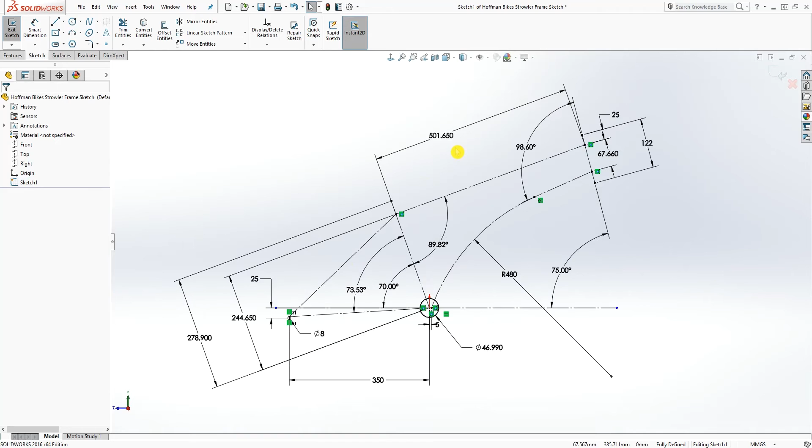Just in case you don't have GrabCAD, let me show that again so you can see all the dimensions. I'm going to move this around so it's clear — this is a 25, and it's just a dimension going from this origin point to that line. I'm trying to make sure you can see everything, just in case you choose not to download the file and want to draw the sketch yourself.

The best way to do it is to look at this shape, try to draw it first, then go into the sketch and add the dimensions to it. Again, this is the dimension. So to start, we are going to extrude this circle.

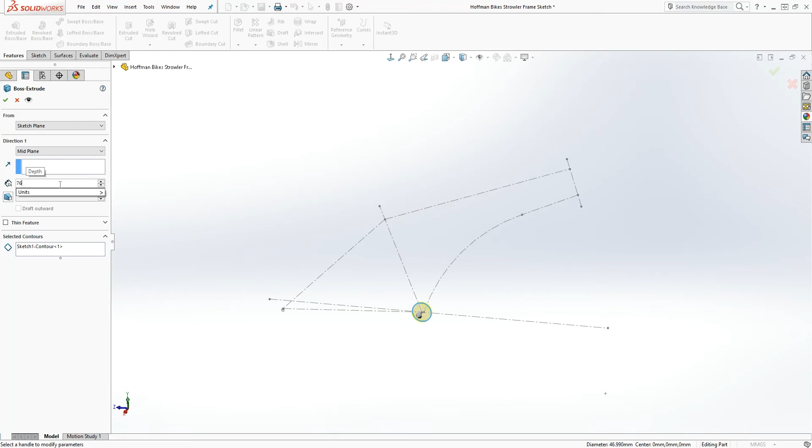We're going to extrude it by the mid plane. I'm working in millimeters, and it's going to be 76.2. So, 76.2, and click OK.

The next thing we are going to do is click on this face and draw a sketch, normal to it. I'm going to draw a circle right on that origin point going out, and my dimension is going to be 51.

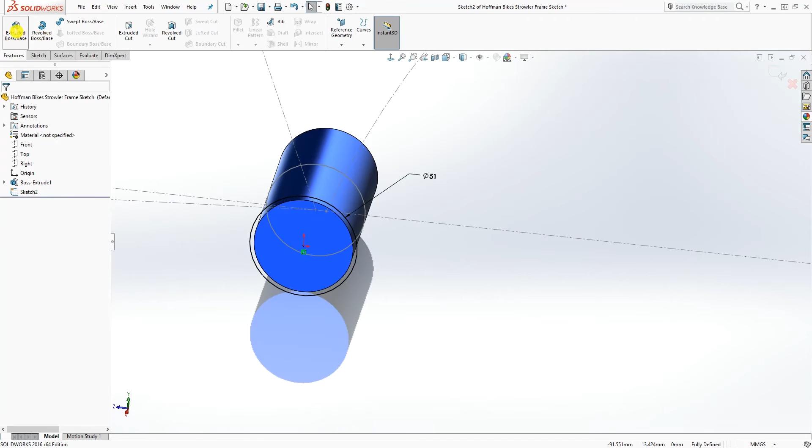I'm going to extrude it 15, going in that direction — oh, I meant extrude cut, excuse me. Make sure you select the extrude cut, going 15 in that direction, and click OK. So now I have something like that.

The next thing I'm going to do is mirror it over. I'll select that, and find the plane I want to mirror it about — in this case, the right plane — and the feature to mirror is that. Click OK.

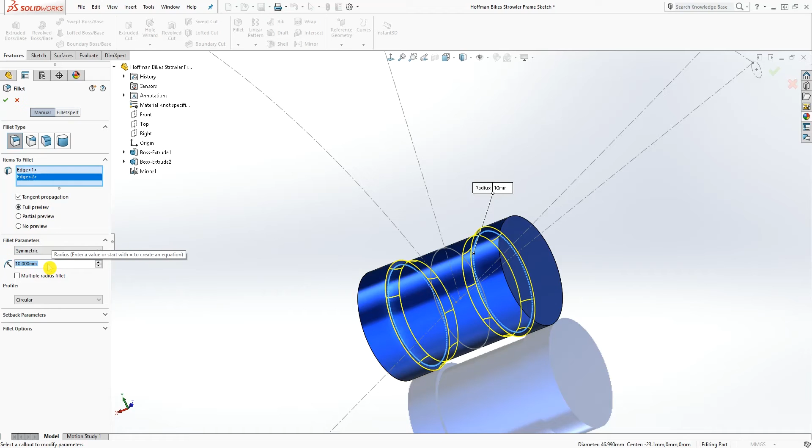So now it's mirrored, and the next thing I want to do is add my fillets. I add a fillet over here and another over there. My fillet size for that one will be 10. Click OK, click OK — so we have that fillet.

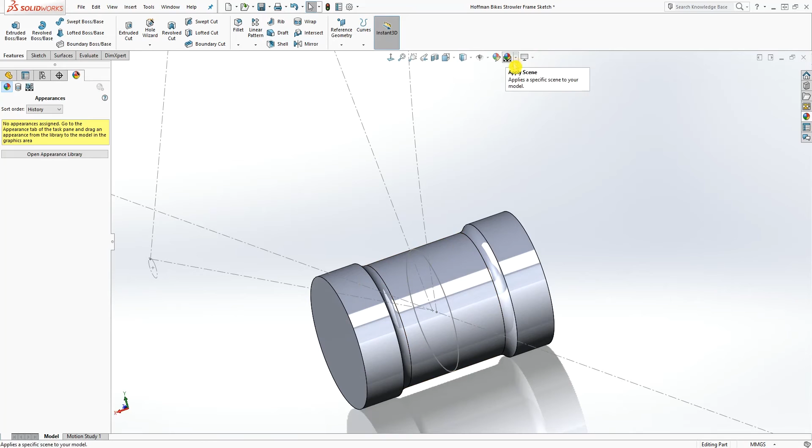We're going to add another fillet. I have my material on it now, which might be confusing, so let me remove that appearance for now so you can see what's going on, and I'll turn off my real graphics as well. Now let's go back into that part.

So again, the next thing we want to do is add another fillet — add it to this top edge and that top edge over here, and the fillet size will be 2. Click OK.

Now we can start adding these shapes. The first thing we are going to do is, on the right plane, select draw a sketch — let me go normal to it.

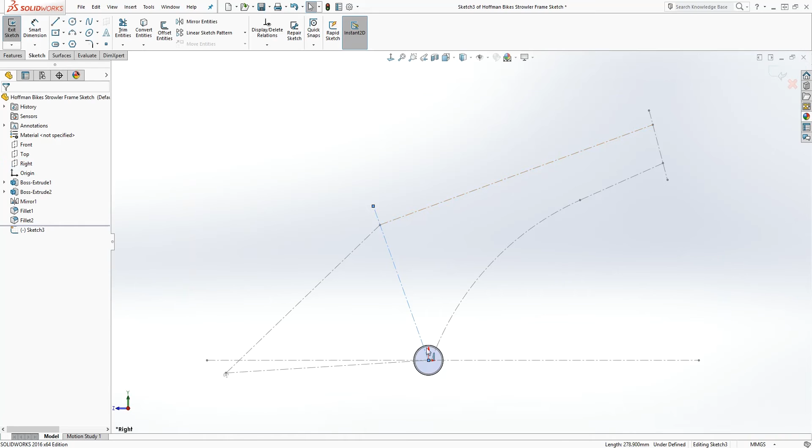So I'm on the right plane and I'm in sketch mode now. I'm going to select this line and press convert entity, and once that's converted, I can exit out of that sketch. While that sketch is selected, go into the feature and press sweep. Select this circular profile and sweep it. The diameter is going to be 32 millimeters, so click OK.

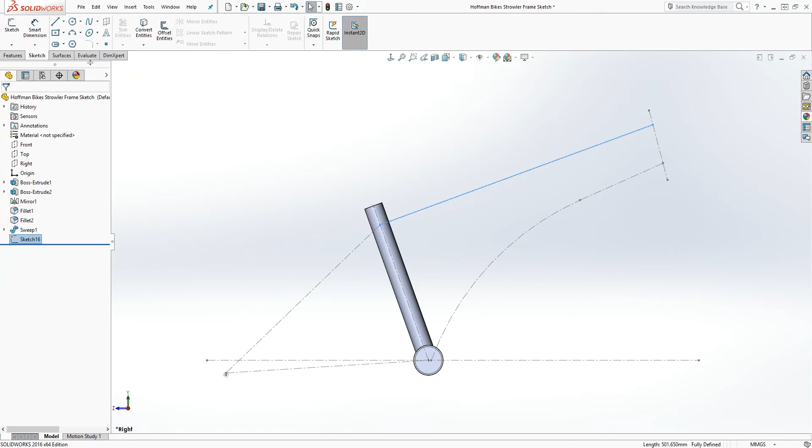We'll repeat that process for everything. For this top bar, select your right plane, draw a sketch, select that top bar, convert entity, exit your sketch, go back to feature, sweep. Make sure that sketch is selected and circular profile, and that will be 36, click OK. We'll do the same thing over here: another sketch on the right plane, select this line, convert entity, exit sketch, feature, sweep, circular, and that would also be 36.

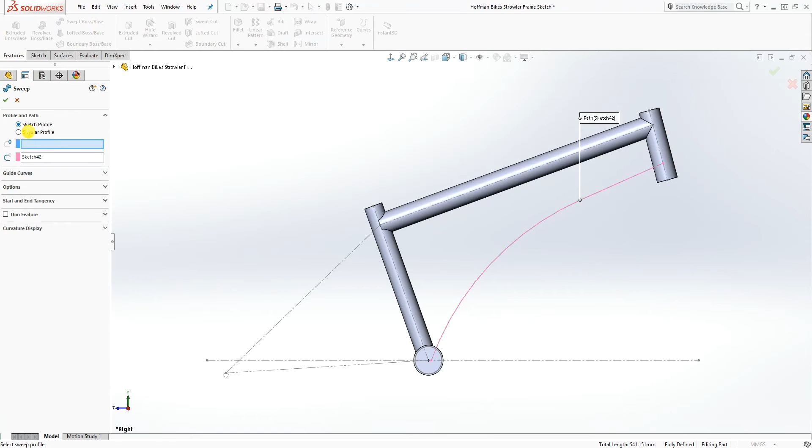Next we want to do this bottom bar, so same thing: right plane, sketch, and select these two lines. You can select one line, hold control, select the second line, convert entity, exit sketch, back to the sweep feature, circular, and that will be 36.

We have half of our frame done, and as you can see everything is coming together. The only thing we have to do now is the back frame, and we are getting close.

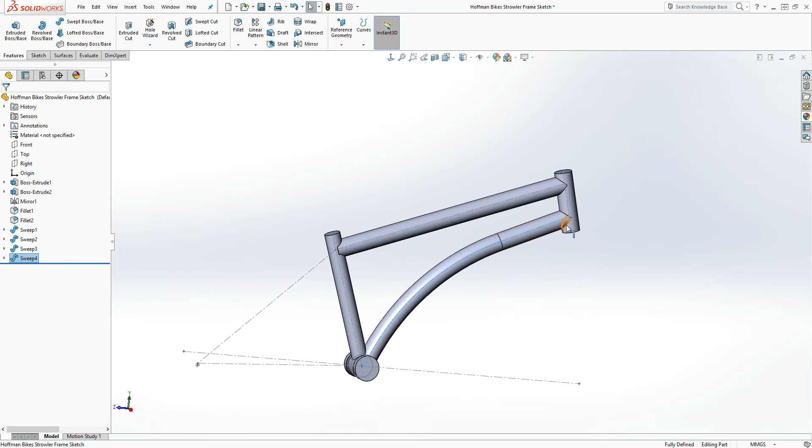The next thing we want to do is select the right plane again, sketch, Normal To, and come up here and draw a line coming from that midpoint out, drawing a shape going like this, touching there and coming back and up.

So what we are going to do is add a constraint to it. These two lines are perpendicular, that's what we want. Also make sure this line and this line, holding the control key, are also perpendicular to each other, and make sure this line and that line are also perpendicular, control key, make sure this line and this line are perpendicular to each other.

Now the distance of this line is going to be 7.5, and the top distance is going to be 20, and the angle is going to be 68. So from here to there is going to be 68.

So that sketch is fully defined, and we want to do the same thing at the bottom. Again, draw a line from this point coming out and perpendicular, something over there, over here, and something like that. Make sure again to add your constraint, making sure this line and that line are perpendicular to each other, and this line and this line are also perpendicular to each other, and this is 20.

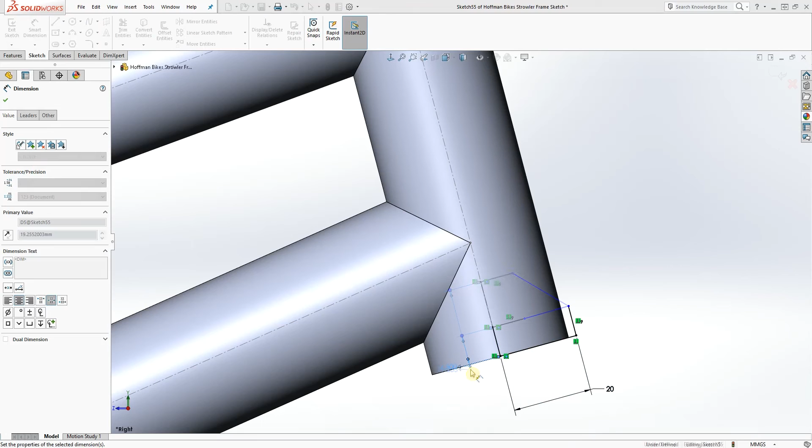So we want to select that line, make it 20, and select this line and make sure it is aligned, and that is 7.5. Or another way you can do it, we want to bring this angle up, make sure that angle is up. Sometimes I was running into this problem earlier.

So what we want to do now is select this edge, that edge, and this point, and I'm trying to make that coincident, but for some reason it's not doing that. I am trying to make this point coincident with that edge, and for some reason it doesn't want to work. So what we can do is select this point—not the point—select this line and select this line, and since we are trying to make the same shape, just make those two lines equal to each other, and that should make this line the same length as that one.

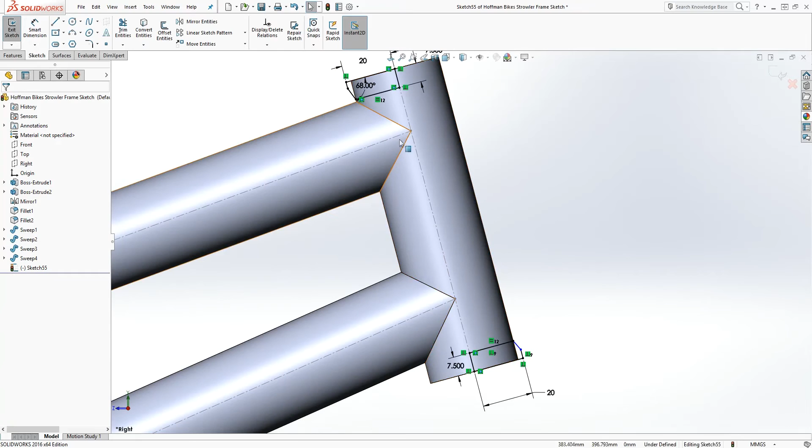Now all I can do is just add my dimensions to it, and my angle dimension will be 68. So I have a sketch that's fully defined.

Back into my feature revolve, and we want to revolve—actually, let's just cancel that, exit out of that sketch, and while your sketch is selected, now revolve. The reason I wanted to do that is because I have this sketch open and sometimes it confuses SolidWorks. So your Sketch55 is selected and you just need to select the axis, so we're going to select this line. Now we're going to revolve that, and we have that shape.

So the next thing we are going to do is start drawing and designing these bars and frame back here.

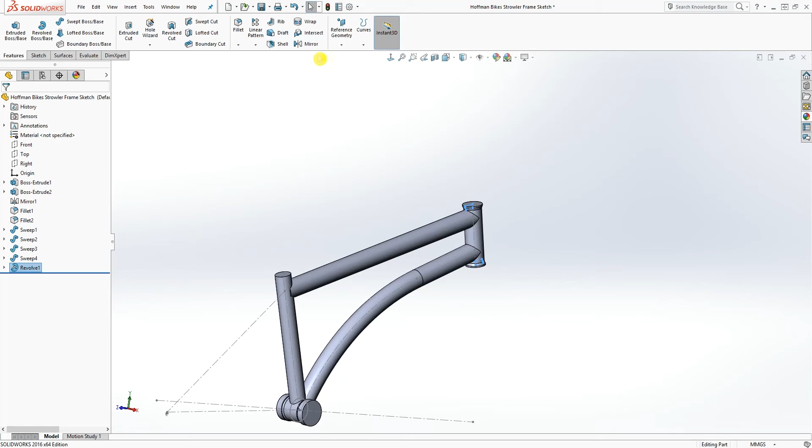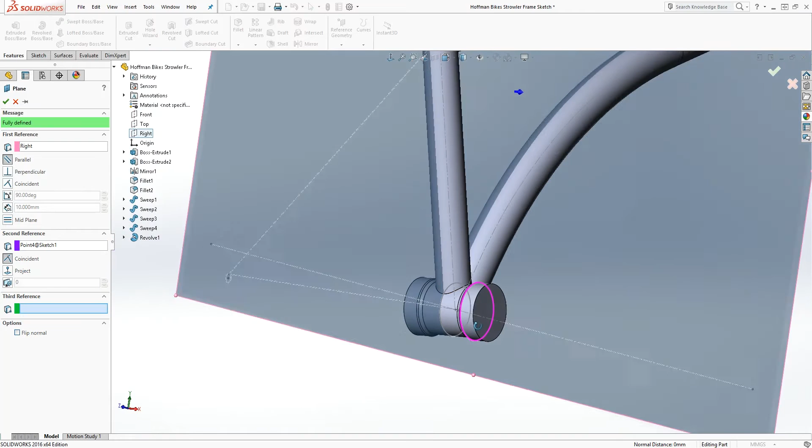Next we are going to draw a plane. Select the plane option, and we want to select the right plane as our first reference plane. While this sketch is still visible, select this top point as your second reference point, and select the origin point as your third reference. So it's the top point and the origin. Let me zoom in so you can see it. Now you have your new plane, click OK. So now we have our new reference plane, and while that plane is selected, we'll draw a sketch on it.

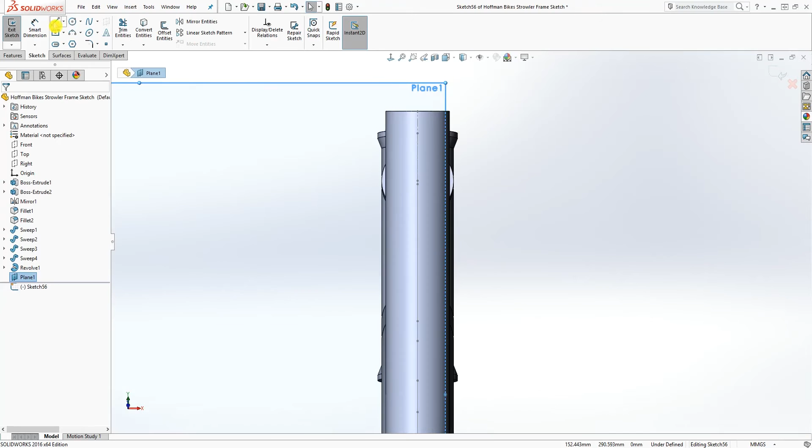We'll go Normal To, and let me make sure it's on the back correctly. We want to go Normal To, Normal To again, so make sure your origin point's arrow is pointing in this direction. We just want to draw a line, a midpoint line, starting at this back point, and draw something like that for now. Go Normal To again, make sure that line is horizontal, not vertical, and drag it somewhere here to make it coincident, and make it a construction line. That's all you need to do, so make sure you draw that line and exit out of the sketch.

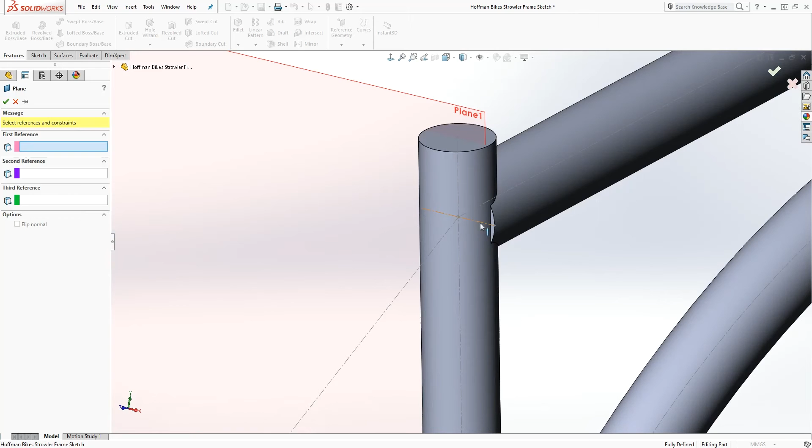Next we are going to draw another plane. Select the plane option, and now select this line and this point, so we want a plane that is laying on that sketch. Click OK, and that's what you want. Since we don't need plane 1 for now, we're just going to hide it. So we have our new plane, which is on this sketch.

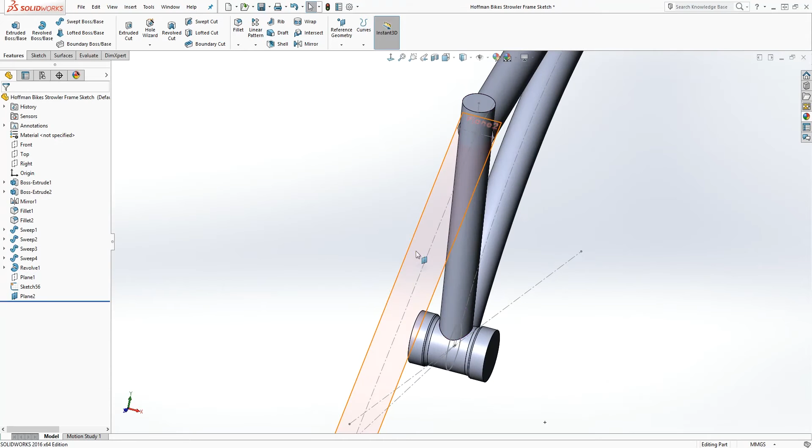So we're going to select that plane and start a sketch on it, Normal To, and make sure you go Normal To again, so your arrow is pointing this way, that way that plane is on top. Because if I go Normal To and the plane is on the bottom, it could be a little confusing. So make sure you go Normal To, press it again, and make sure the arrow is pointing in this direction, so you're looking at it from the top.

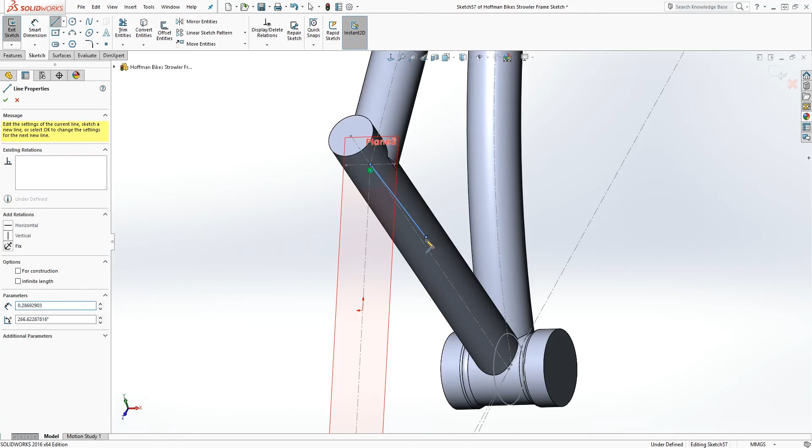Now we want to draw our sketch. I'm just going to bend this a little bit, and you want a line from that point. So just draw a line and another line, and let me go Normal To again so you can see what's going on. Draw a line like this, and also draw another line in the middle that is vertical, and make that line a construction line. Now we can temporarily hide that first sketch so you can see what's going on.

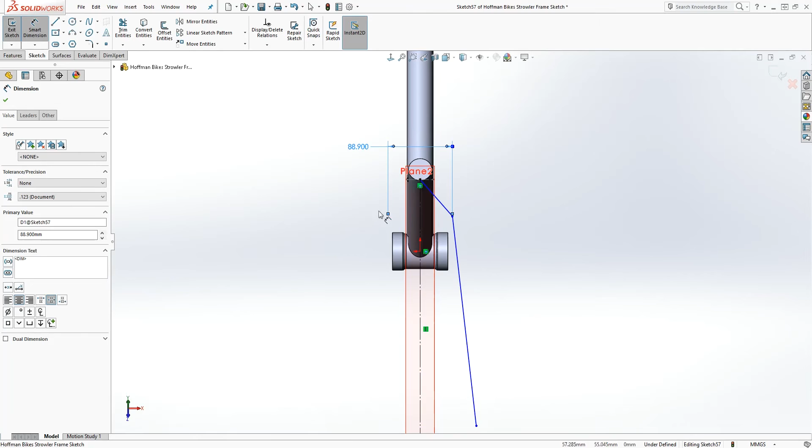Now we're just going to add our dimensions. From this point to that point is going to be 88.9, and that is the diameter. Notice when you select the point and the center line and drag it out, it gives you the overall length, and that's what you want. For this one, from this point to that point, that is going to be 330, and from this point to that top point, it is going to be 63.5. We need one more: from this point to the center line again - if I move it here, it gives me half of it, and when I move it to this side, it gives me the entire length. So that is going to be 114.3, and click OK. Our sketch is fully defined.

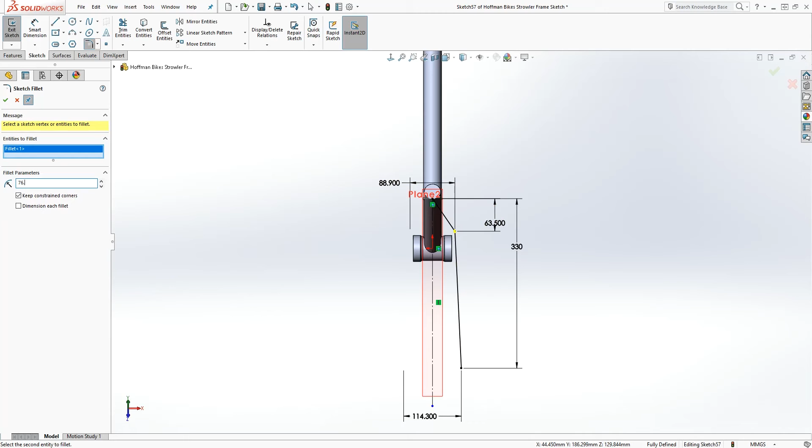We need to add one more thing, so we are going to select the fillet tool and select that point to add your fillet, and change your fillet size to 76.2. Let me zoom in so you see what's going on. 76.2, and click OK. So our sketch is fully defined.

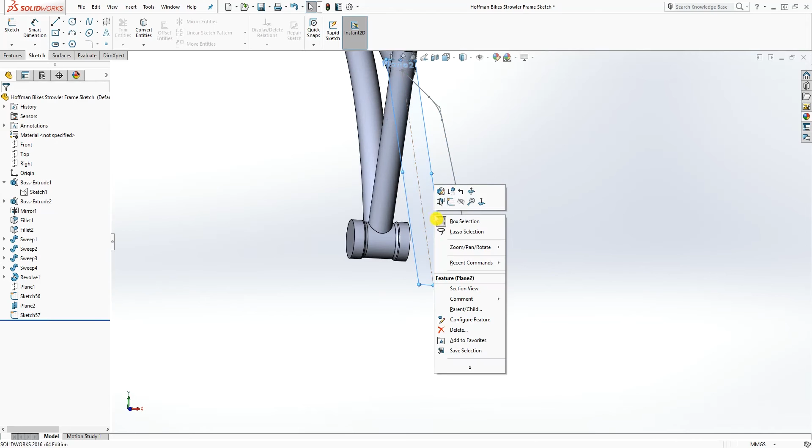Let me move this around. Fully defined, and I'm just going to exit out, and I can hide that plane for now. What we want to do is draw another plane. So go back into our feature, select reference geometry plane, select this line, and select that point, so that way we have a plane that is perpendicular to that line, and that's what we want.

And now we are going to select that. I didn't select, okay, let me do that again. Reference geometry plane, this point, this line, and that point, and click OK. So we have our plane 3, and while that plane is selected, you're going to start a sketch.

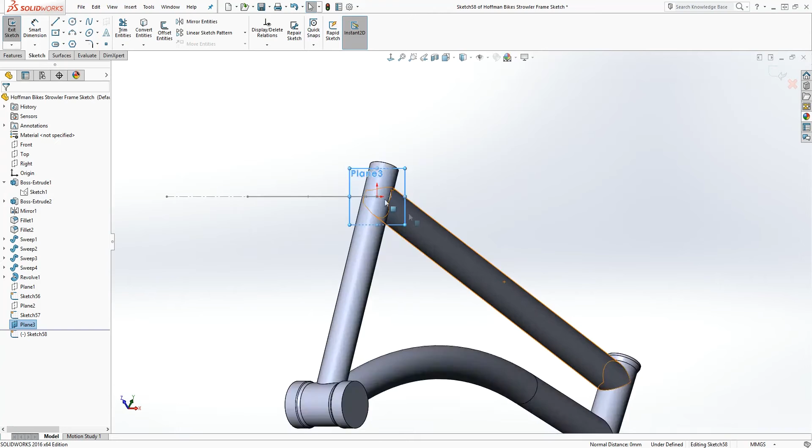So your sketch is on that plane. Make sure you go normal to. It should look something like this, and zoom in, and now draw an ellipse on that point, on that origin point. Just draw your ellipse, something coming up and there. Make sure this point and the origin point is vertical to each other.

The top dimension, this dimension is going to be 15.5, and the second dimension, which is from this point to that point, is going to be 12. Once our sketch is fully defined, we're going to exit out of that sketch, and we can hide our plane 3 for now so it doesn't get confusing.

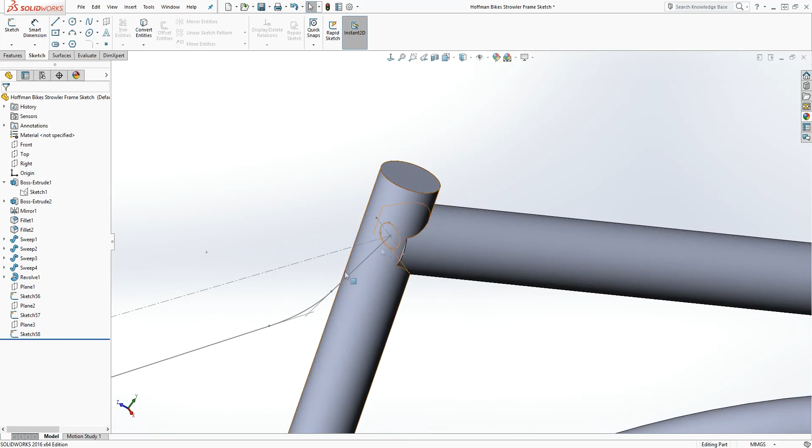So we have our profile and we have our path, and what we are going to do is go into the sweep feature. Select your profile, and select your path, and you're just going to sweep it around there, and make sure your profile and your path are correct, and select OK. So that we have that top frame done.

So we need to do the same thing at the bottom. Let's show that first sketch again. Now select your top plane, which is right there. Draw a sketch, which is going to be a midpoint line, and go normal to, and just start the sketch at the origin point and drag it somewhere out like that, and make sure it is horizontal, and make it a construction line, and exit out.

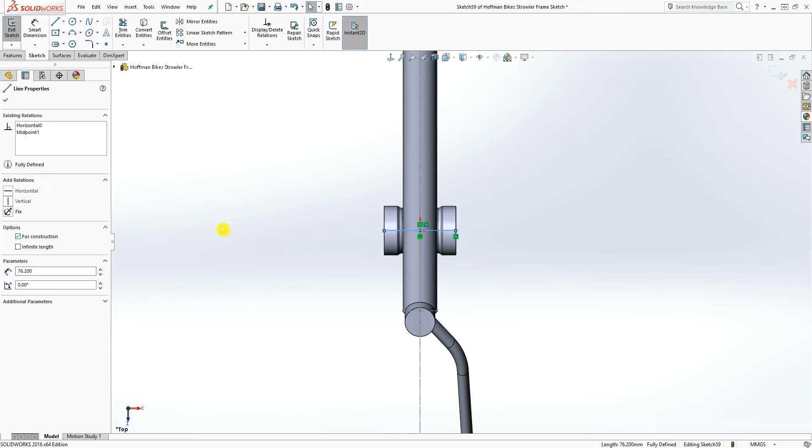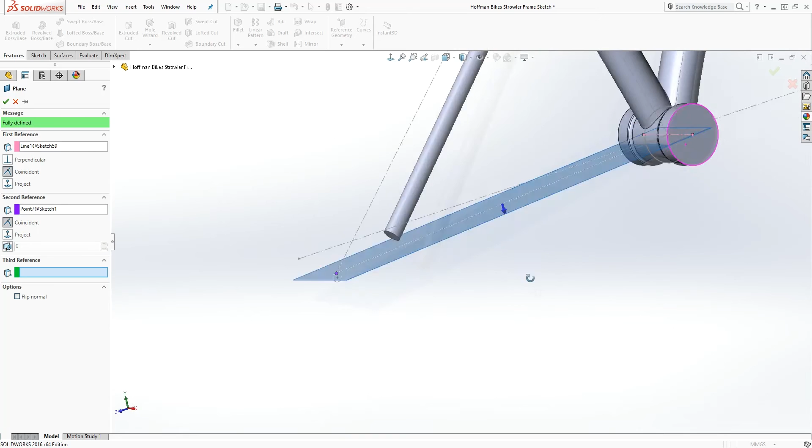And now you want to draw a reference plane. Go back into your feature, reference geometry plane, select that line you just drew, and select this point. So you draw your reference plane on that bottom edge on that bottom sketch. I hope you can see, I know it's a little bit confusing, but I hope I've been able to explain it a little bit clear. Click OK.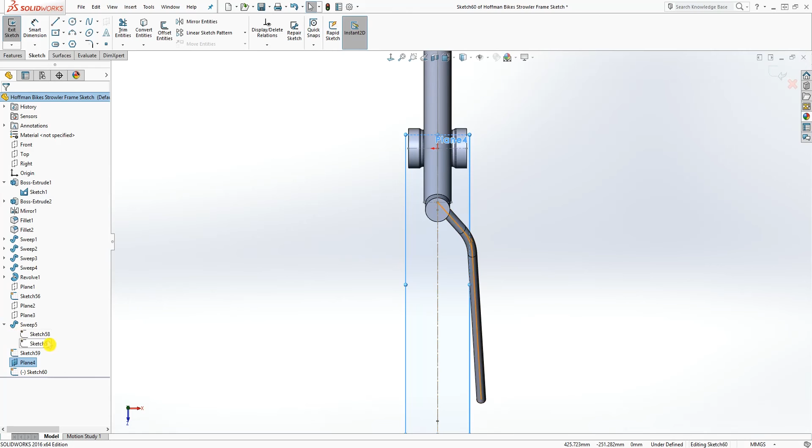So now while that new plane is selected, you want to draw a sketch, and go normal to, so that way you're looking at it, and go normal to again, so that way you're looking at it from this point. So what we want to do is make sure this profile, let's show that sketch. We are going to select this sketch, that sketch, and this sketch, and we are going to convert entity, and you can hide it now once you do that.

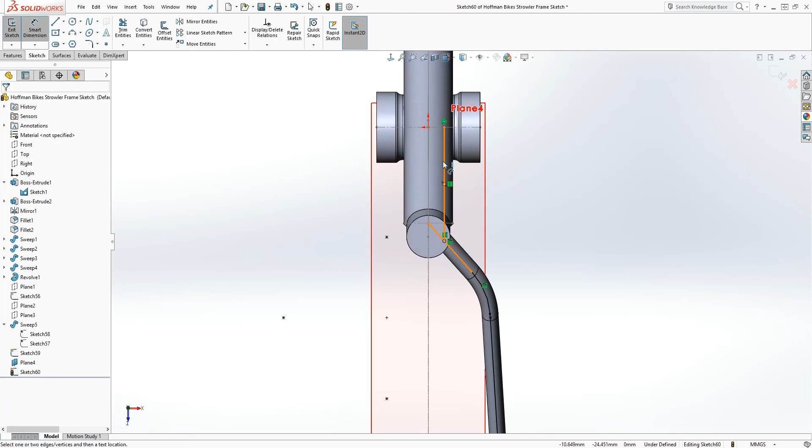So we have that sketch over there, and we are going to draw a line from this point just coming down. Just draw a line that is vertical coming down and kind of like touching that sketch. The distance from this line to the origin point, let me make sure that line is vertical, and the distance from this line to the origin point is going to be 25. So everything is fully defined.

So what we're going to do is trim this excess line off, and at this point we are going to add a fillet over here. Let me select my fillet and change my fillet size to 22, and I'm going to add it over here and click OK. So I have a fully defined sketch, and I'm just going to exit out, again, so you see what's going on, and I can hide that plane 4. Let me just hide it, and let me exit out of the sketch.

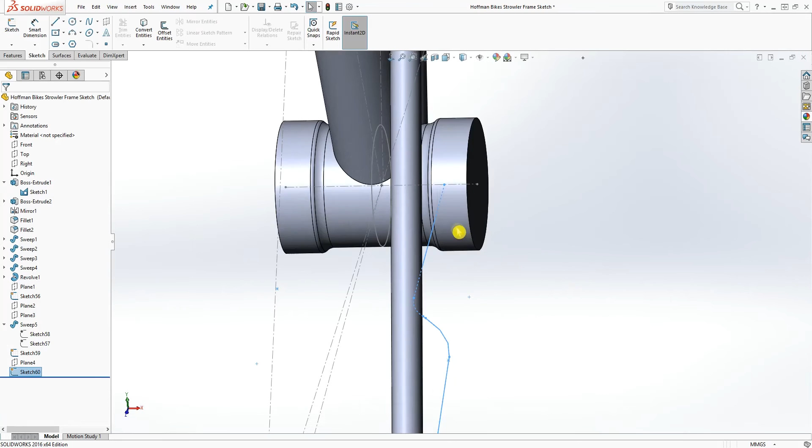So the next thing we are going to do now is draw another plane, reference plane, select this line and select that.

Select that line and select this point. Draw a reference plane over there and click OK.

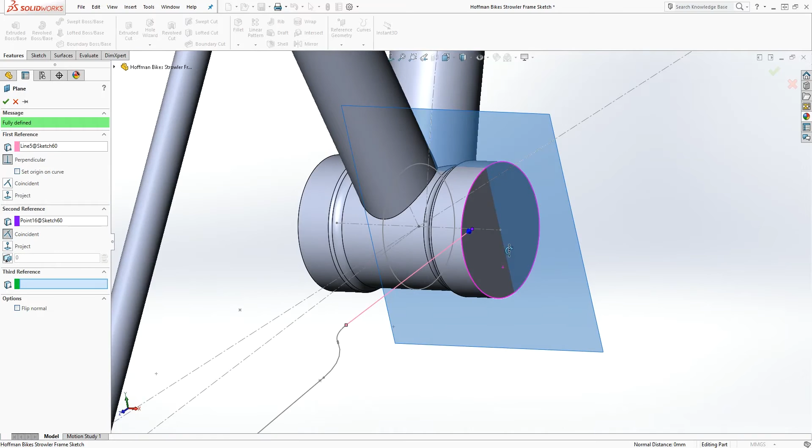Now once you have your sketch, while that plane is selected, draw a sketch normal to, and make sure you just draw an ellipse on that. Make sure it is on that point and something going out like that, and I can go normal to again, and I'm going to zoom in, make this point and the origin point vertical again.

Now add your dimension. This is going to be 15.5, and coming down from that point to that point is going to be 12.

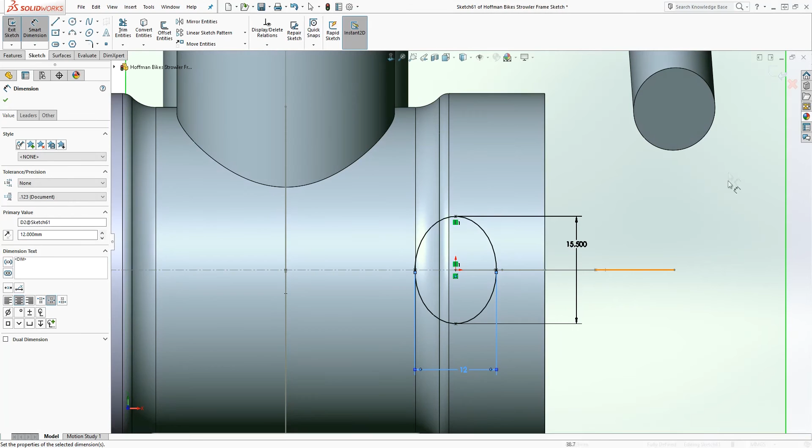Exit your sketch. I can hide that plane now, and we have our profile and our path. So again, go into your sweep feature, select that ellipse you just drew, and select the sketch as your path.

Now we're moving along with this, and the next thing we need to do is select the right plane. Before I do that, make sure this top sweep shows that sketch. Let's hide this for now, hide that sketch, I don't want everything to get confusing, and we can hide this sketch too. We don't need that sketch, so just showing that top sketch.

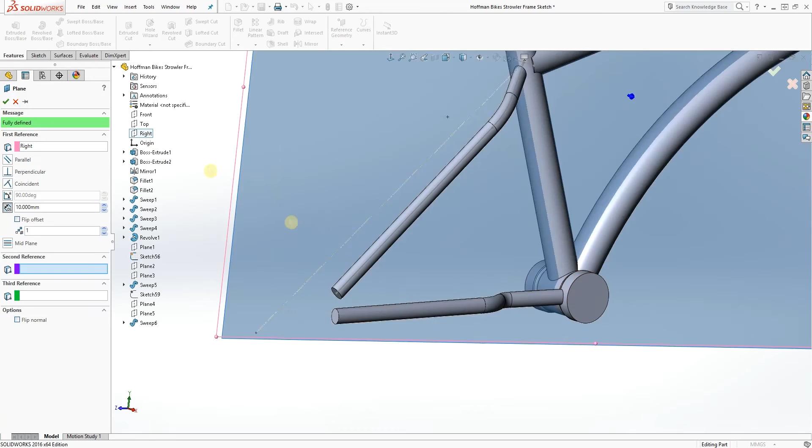So select the right plane, and now select reference geometry plane, and our first reference plane is the right plane. Now we want to select the start point on that sketch as the second point, because we want to draw that plate between these two features. So click OK.

While that plane is selected, draw your sketch, normal to, and now we're just going to draw another ellipse somewhere over here. So we're going to draw something like that, and the dimension from this to that going up is 50.

The dimension from here to here is 62.770, and the dimension from this top to the origin point, I'm going to have to move it around to be able to get that dimension. Okay, so make sure you move it up somewhere.

So the dimension from here to here, it is not that point, this point and the origin point, and I want something linear. I'm not getting that now, so let me add a couple the other ones maybe.

So the origin point to the midpoint of that ellipse is going to be 337, and add another dimension from this point to the origin point, and that is going to be 328.

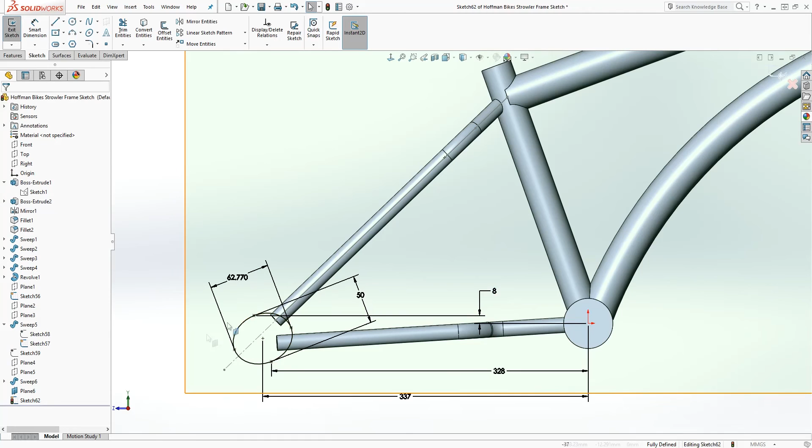So my sketch is fully defined and I have my profile. What I'm going to do is exit, and go into my feature, extrude, and you want to extrude it by the mid plane, and it is going to be 3.7846, and click OK.

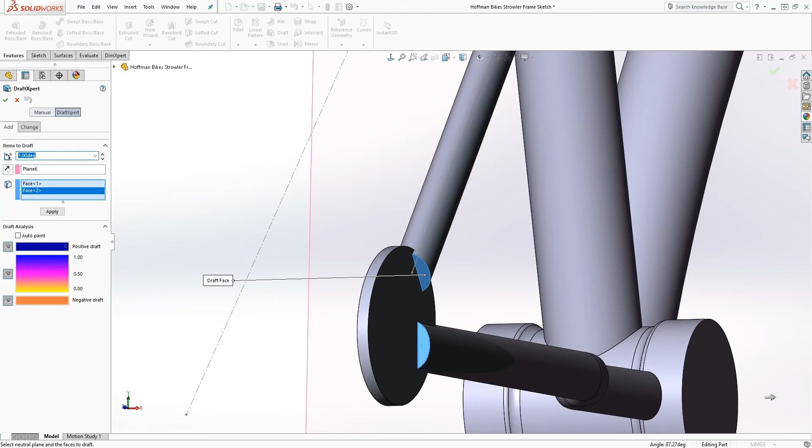So now we have that. Another thing we want to do is add a draft angle here. Click on this draft, and your reference plane is going to be that plane, which is your plane 6, and you should just select these two faces, and the draft angle is going to be 65, and click OK.

So you have that draft angle, and we are going to do the same thing on this side. Draft, select this plane first so it shows plane 6, and select those two faces and click apply. So the draft is going in the wrong direction.

So I can click OK and come down here and just edit that draft, and what I want to do is switch the direction and click OK. So now I have it going in the right direction.

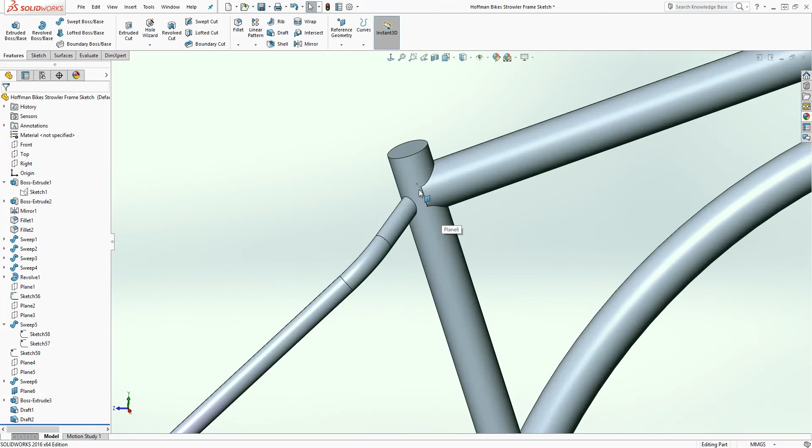So the next thing we want to do is we can now hide this sketch. We really don't need it, and we can hide this sketch as well, and let's show our first sketch because we need that. Click on this face and draw a sketch.

Go to normal to. You can hide that plane 6 too, just so it doesn't get confusing. So we are drawing a sketch on this plane.

Draw a line, then draw two more lines over here and another line down here. Click this line and that circle and make sure they are tangent, click this bottom line and that circle as well and make sure they are tangent to each other. Also draw another circle over here, something like that, and make this circle and that line tangent, and make the circle and the bottom line also tangent to each other. So you have something like that.

Another thing you have to do is make this line and this line parallel to each other, and just drag them out like that. Now we are going to add our dimensions.

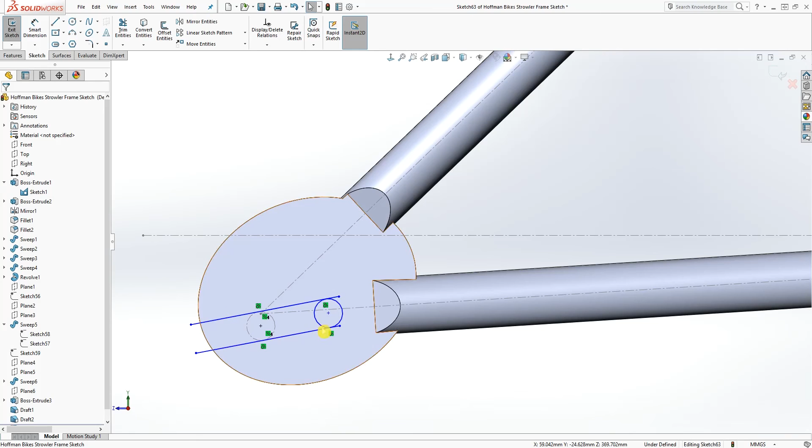First I'm just going to trim this off, so the circle looks something like that, and close this off. You can make this a vertical line, it doesn't really matter as long as it's sticking out.

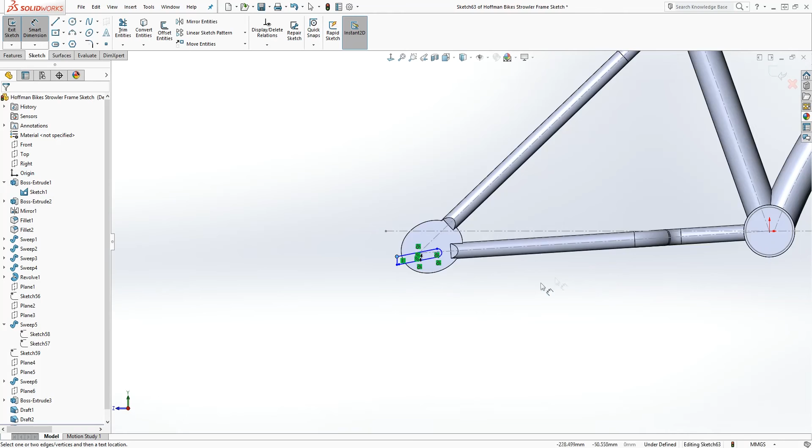Now add the dimension from the origin point - not from there, from this point to the origin point. So that point to the origin point is going to be 331.82.

And we want to select this point to the center line of that circle, which is going to be 17.89.

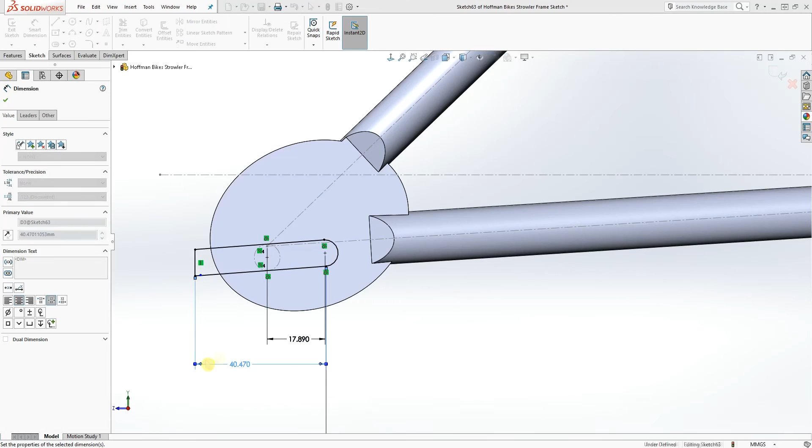The last thing we want to do is just fully define this, so you can add a dimension here to fully define it. I have a sketch sticking out over here, so I'm just going to delete that.

Make sure your sketch is fully defined, then go back to your feature, extrude cut, and extrude cut to next. Click OK.

Next we have pretty much half of that done, so what we are going to do is mirror it over. Let me hide that sketch again for now. So we have that feature, let's mirror it over.

Select your mirror, the right plane - you want to mirror it about the right plane - and the features you want to mirror starting from that sweep 5, and pretty much everything right under it. Make sure you select everything and click OK.

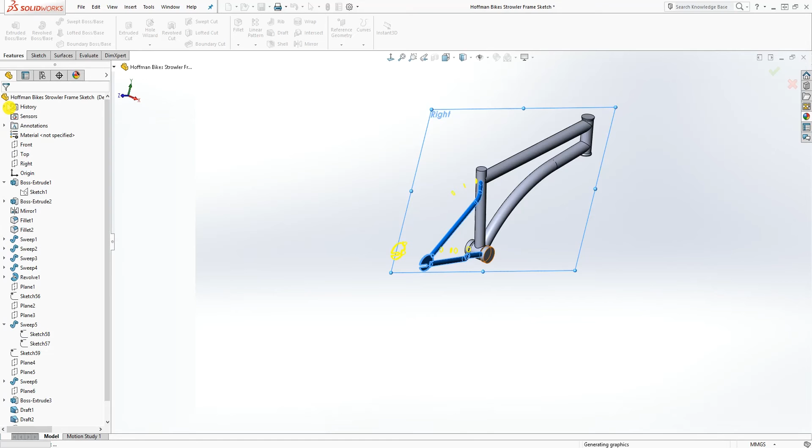Now we want to start adding fillet to it. Select your fillet tool, and it's going to be 1.25. We won't be able to add the fillet to everything - not the face, the edge. So we're going to systematically add the fillet one by one to the ones we can, and we might have to do it multiple times.

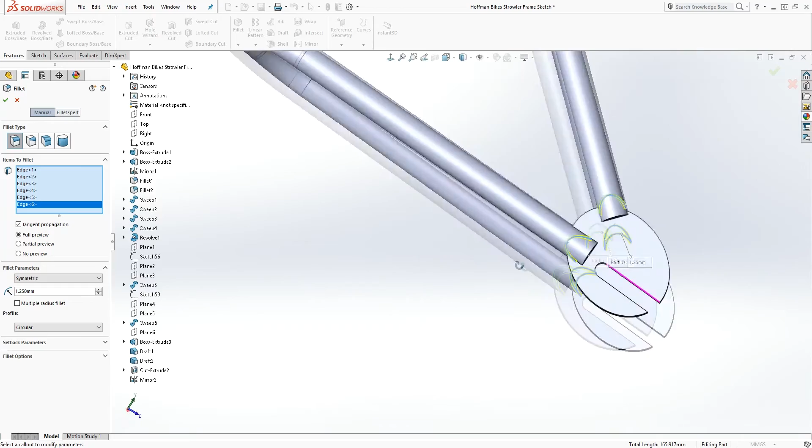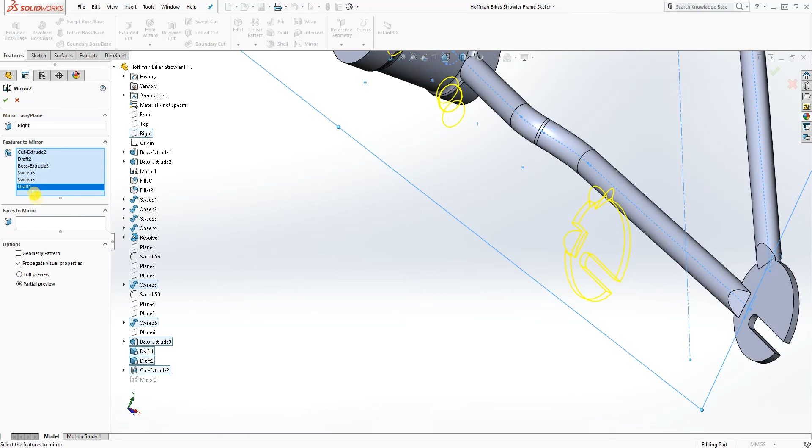So I added it up there, back here, and also here. For some reason, let me go back and verify my mirror tool. My draft angle wasn't selected, so I'm going to select that and make sure it's also showing in there, and click OK, because when I looked over here the draft wasn't on it.

Okay, now let's try that again. Fillet, and I'm going to add my fillet 1.25 to that edge, this edge. You want to add the fillet all around, so just try any method that works for you. This edge, the same thing over here, this edge and this edge.

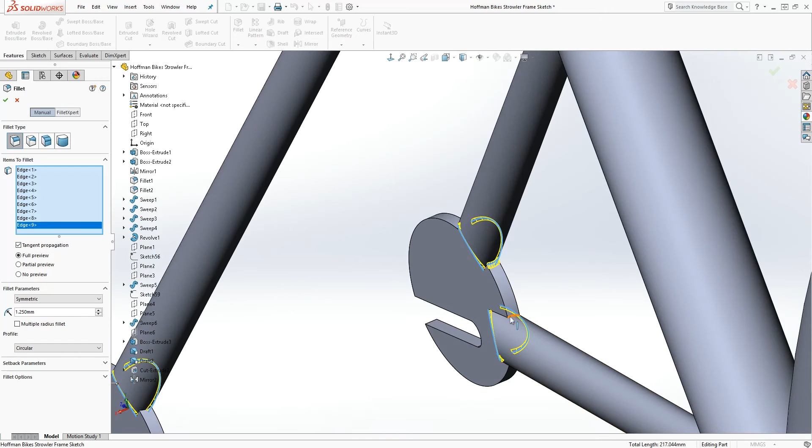Let me see if I can add more, maybe this back edge, and I'm going to try the same thing over here, and right there. I'm going to try this bottom and the same thing over here. Click OK.

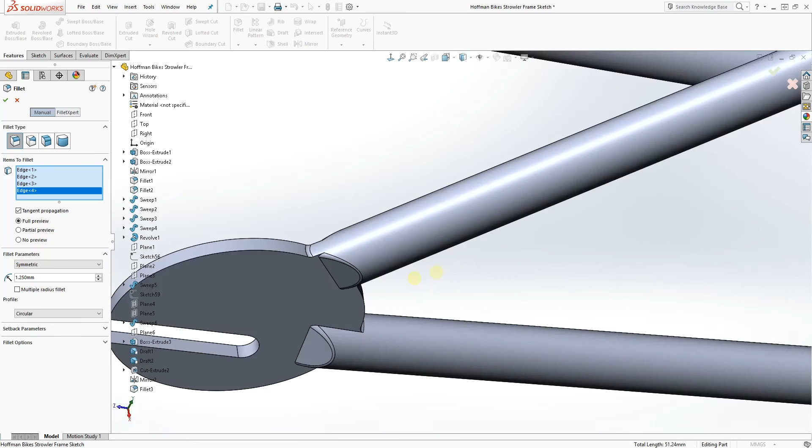Okay, so we are going to click fillet again, but now we want to add it to this edge - not the face, the edge - this edge and that edge. We want to do the same thing on this side too: add it to this edge and this edge, and select the back ones too, and this one. Once you have it on all 4 edges, click OK.

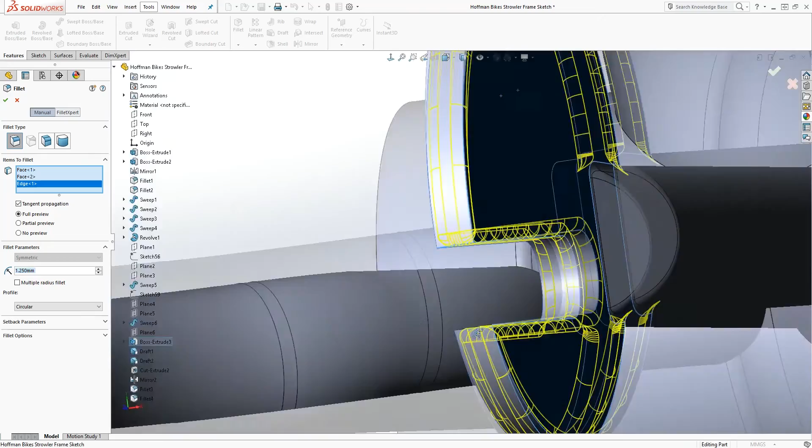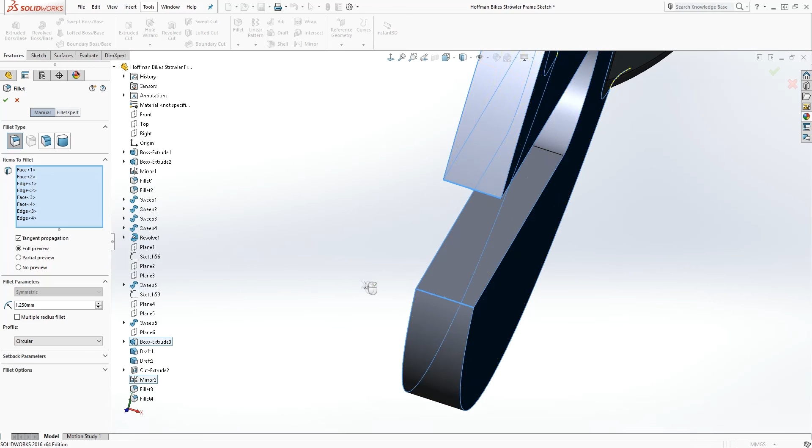The last thing we want to do is add a fillet to this. So we're going to fillet, and let's try this face and that face, and you can click this edge and this edge, so you have your fillet going all the way around. We want to do the same thing here, to this face and that face, this edge and that edge, and click OK.

So we pretty much have the entire frame done. The only thing we need to add now is a couple of fillets and some details. Next, select plane 2, which is the plane you used to make this frame. Select that plane, draw a sketch, go normal to, and make sure the frame is on the bottom. I'll go normal to again so the frame is on top, and make sure the arrow is pointing in this direction.

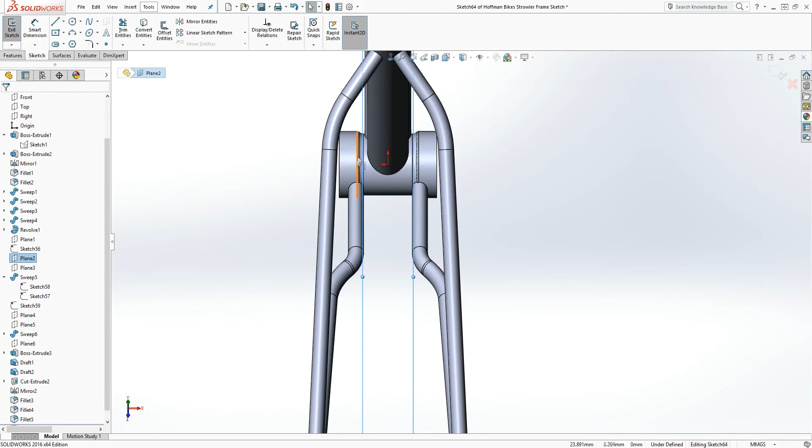Now, at this origin point, just draw a line, something like that, as a midpoint line. Draw a midpoint line somewhere over here, and make sure the line is horizontal. Make this point and the origin point coincident with each other, then draw that line coming out somewhere over here, and make that line a construction line.

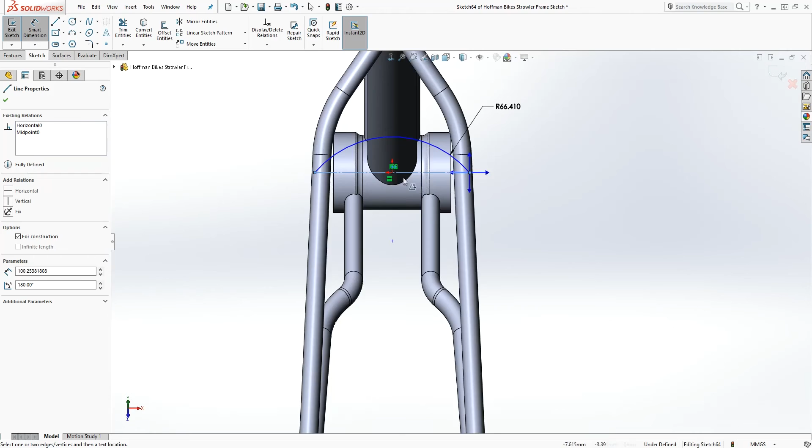Now draw a 3-point arc touching that line, something like that. The radius of that arc, click your dimension, is going to be 66.41. You can move this line up to the inside a little bit. The dimension of that line is going to be 96.31. So that is fully defined.

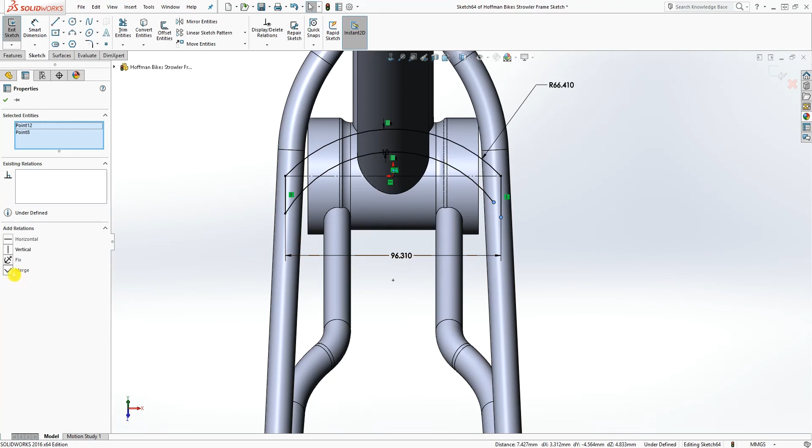Now click your offset, offset this line, and reverse it. Offset it down by 10, and click OK. Drag this edge out a little bit, and drag this edge out a little bit too. Draw another line coming down, and another line over here coming down, making sure that point and that line merge, and do the same thing on the other side.

So your sketch is fully defined. The only thing we want to do now is draw a line that is coincident with this edge, you can see when I hover over here this yellow thing flashing. Make sure the line is coincident, or you can make it coincident with the vertical, it's the same. Make sure that line is a construction line.

Now I'm just going to draw a circle. If I hover on that line, the yellow thing flashes, so I'll draw the circle on that point, and my circle is going to be 4. Everything is fully defined, so you can see what we have. Now I'll go back to my feature, extrude by the mid plane, extrude it by 2, and click OK.

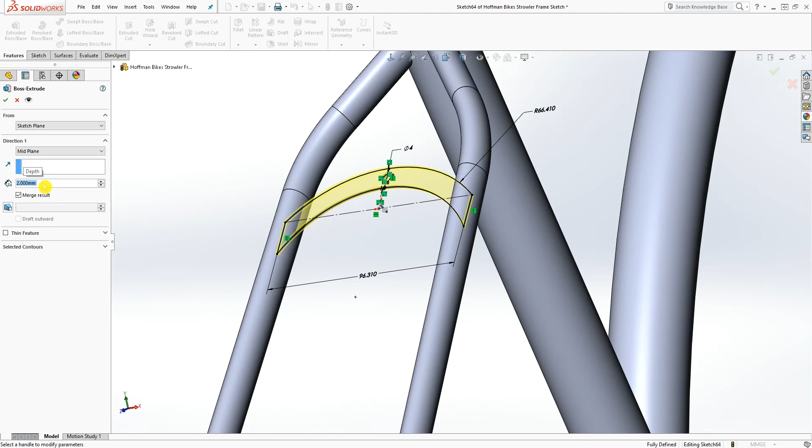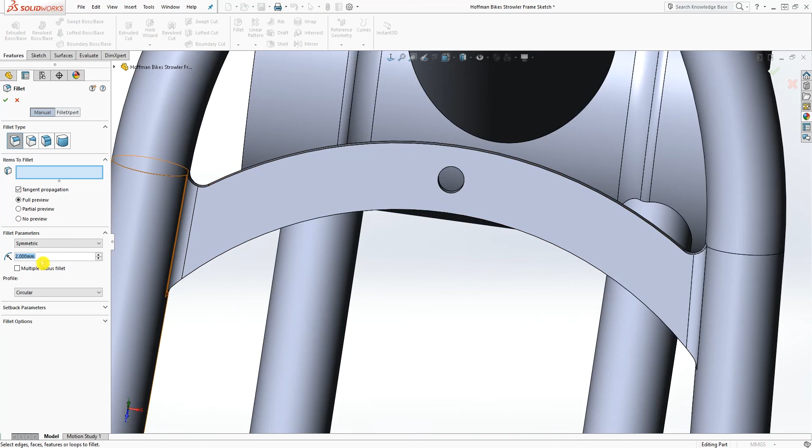The next thing we're going to do is add a fillet. On all 4 edges, we're going to add a fillet of 2, click this edge, that one, and do the same thing on this side, then click OK. Now add another fillet on this top edge, but change it to 0.5, and add it over here on this back edge and down here, then click OK.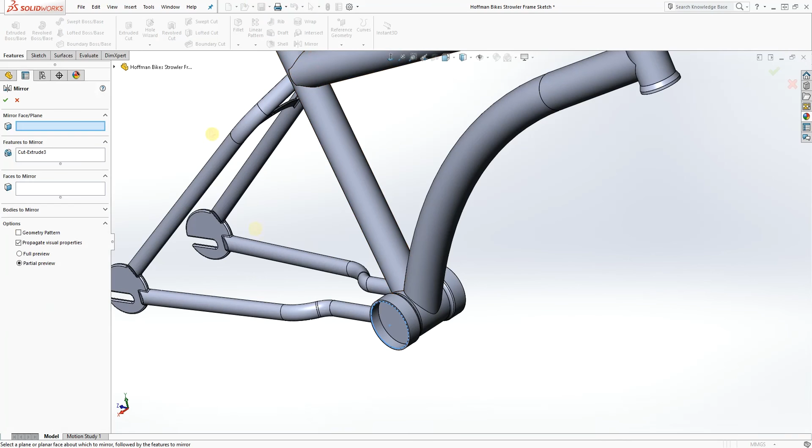The next thing we want to do is add more details. Select this face, sketch, normal to, and draw a circle, then add a dimension of 48. Feature extrude cut, it's going to be 10, click OK. Then mirror that feature over the right plane to the other side, so select your extrude cut and the right plane, and mirror it over.

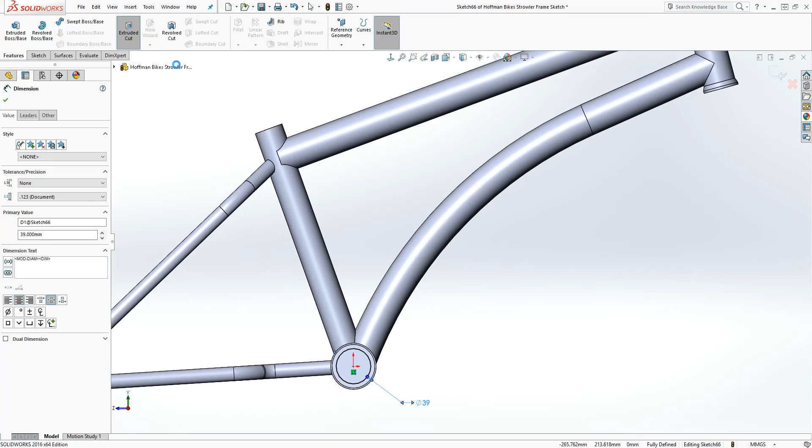Now select this inside face, sketch, normal to, and draw a circle that is going to be 39. Add the dimension 39, extrude cut, and extrude cut up to next, so that hole is going through it, then click OK.

So the next thing we are going to do is add a fillet to this edge and that edge, and the fillet size is going to be 4. Click OK, and add another fillet to the inside edge and inside edge over there, and click OK.

So the next thing we're going to do is address that gap over here. Click on draft, and add a draft angle about the right plane, and it's going to be 36 degrees. Add it to this face and click OK.

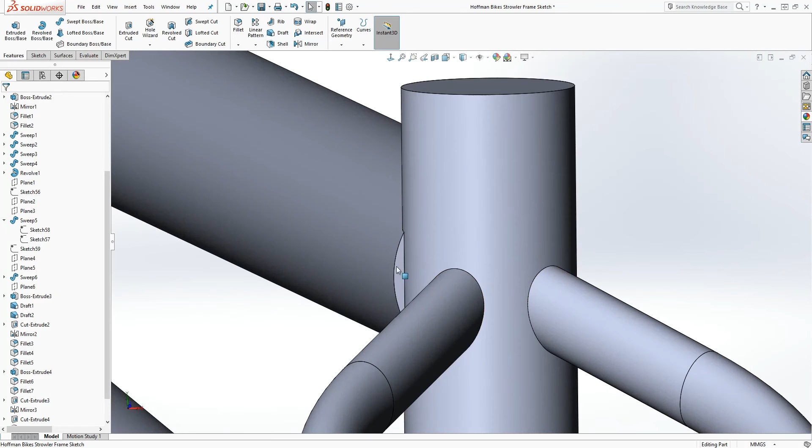We want to do the same thing on this side, so draft the right plane and select this face and click OK. The draft is going in the wrong direction, so I'm just going to edit it, change the direction, and click OK.

So we have that. The only thing we need to do now is add maybe a couple of details here, and we are going to be done.

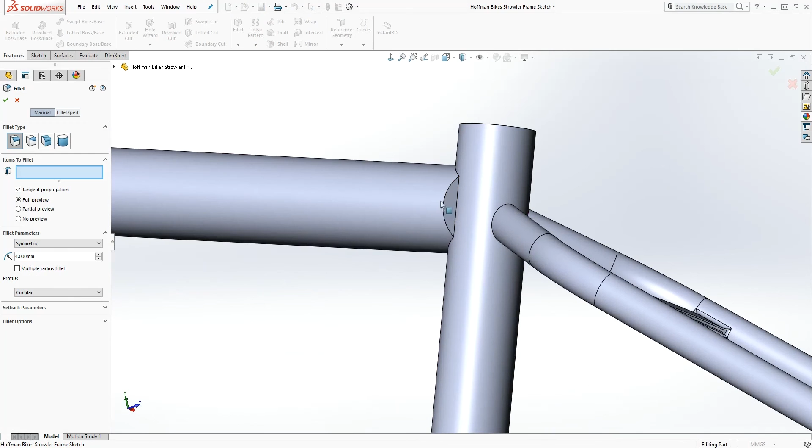Next, let's add a fillet to this edge, this one, we're just going to add a fillet to it. Let me see if I can select that, this edge. I'm not sure what's going on, but let me select this. Here you go. Let me see if I can add a fillet to it.

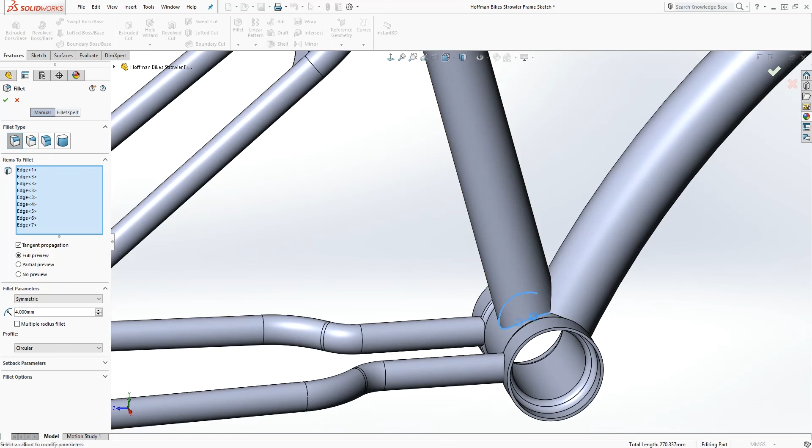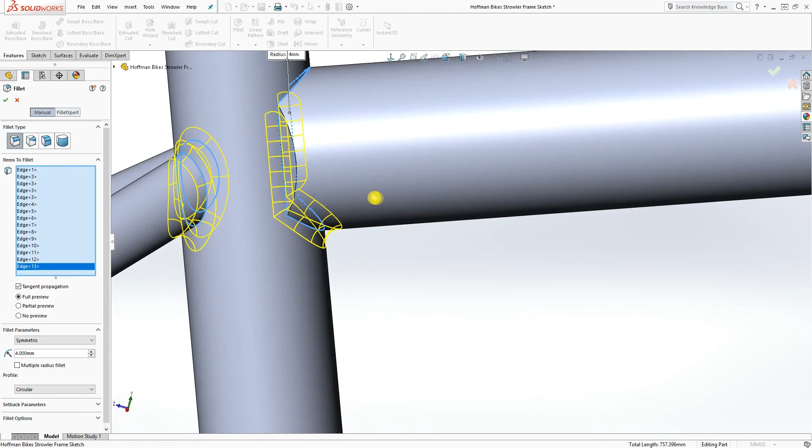So there are a couple of places we want to add a fillet to: here, here, down here, there, and here as well, and here, also up here. I think I have everything, and I think I want to add a fillet to that. Oh, it works. Make sure you select this edge as well. So we have all the places we want to add our fillet, and we'll click OK.

So we have all our fillets in the right places now. We want one more fillet over there, and that will be 3. Click that edge and click that edge, and click OK.

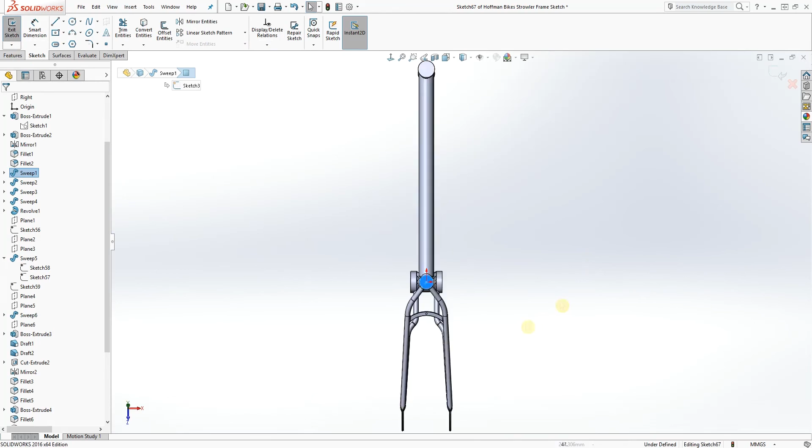So adding more details to it, click this top face, sketch, normal to, and we are going to draw a circle. Dimension is 29. Feature extrude cut, and we want to extrude cut up to next, so it's coming down to that point. Click OK.

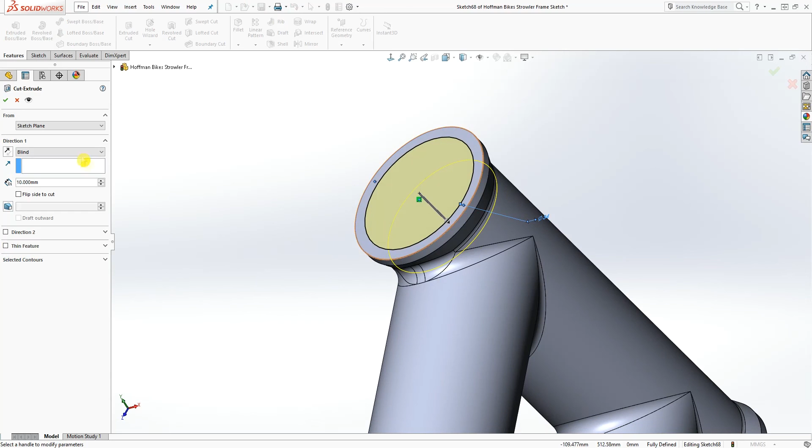The last couple of things we want to do is just over here. On this top face, sketch number 2, zoom in, and I'm just going to draw a circle that is coincident with that center point of that circle, and the dimension is going to be 34. Feature extrude cut, select up to next, so it's cutting all the way down, and click OK.

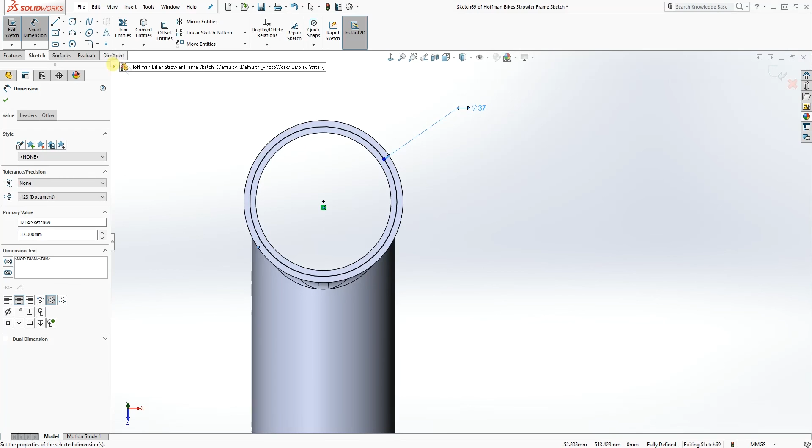Again, select the top face and sketch number 2. On that top face draw a sketch and draw another circle. If you hover over this, the center point should show, and just draw your circle and add the dimension to it, and it will be 37. Feature extrude cut, we extrude cut down 4, and click OK.

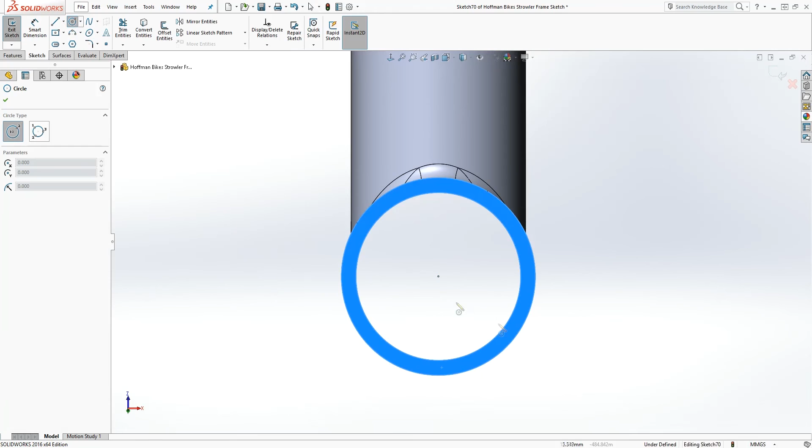We want to do the same thing on the bottom. Select that face, sketch number 2, draw your circle. If you hover over this, there you go, the center point, and that is also 37. Feature extrude cut 4, click OK.

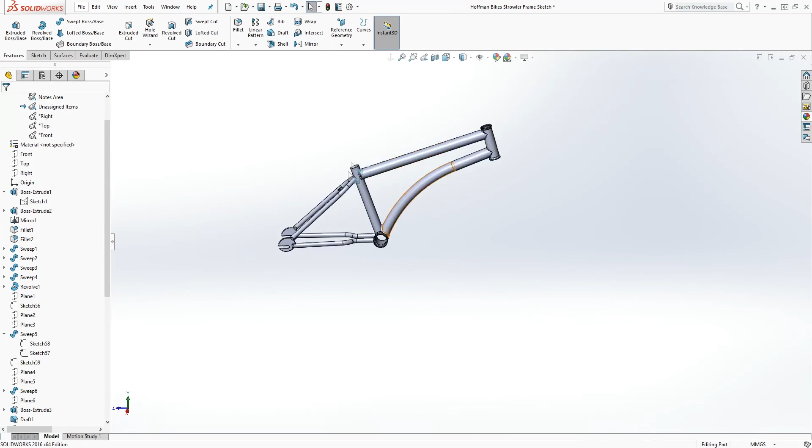And the last thing we want to do is just add the fillet. Add a fillet here, and the fillet size will be 2. We add it up here too. Click OK, and add another fillet on this top edge and on that top edge, that is 2, and click OK. And there you go, you have your frame fully designed and ready to go.